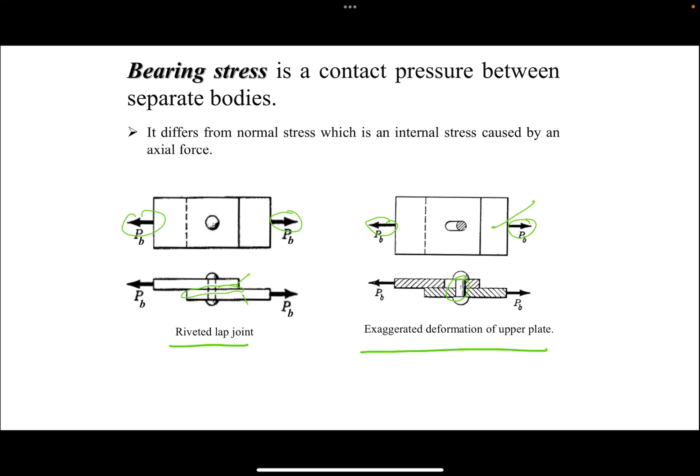Our axial forces appear here in our riveted lap joint, similar with the exaggerated deformation of the upper plate. So this is the view - we have forces pulling it, and the contact pressure that develops is our bearing stress.

The actual bearing stress distribution on the side of the hole is not constant. We know that it differs - the pressure here is not the same as the pressure in the middle and at the end point, so the pressure will still vary since it's not constant.

So the formula for bearing stress is given by PB over AB - our force over the area. That's always the formula for stresses, force over area. There's no difference there.

Again, sigma b is equal to Pb over Ab. For the bearing, this is the projected contact area of the rivet and the plate. So this is the projected contact area between these two separate bodies, which is the rivet and the plate.

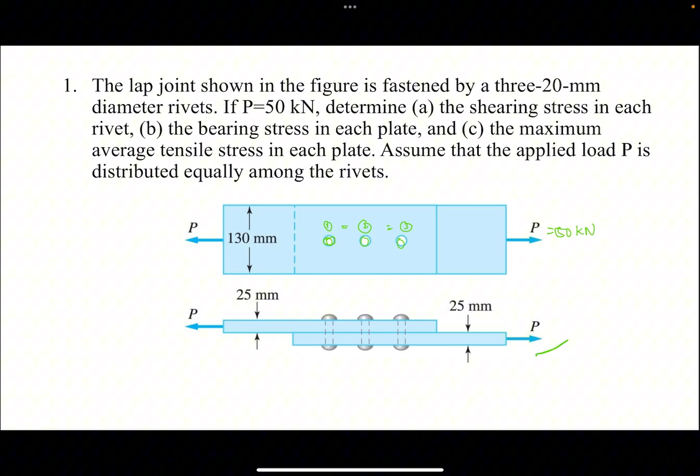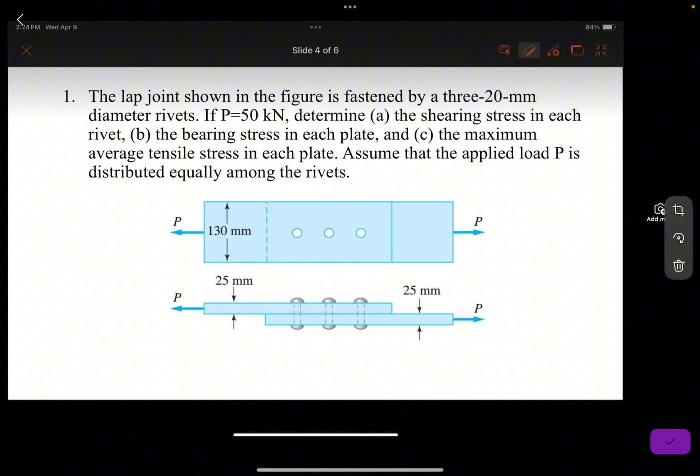Let's now solve the problem. Let's look at it carefully. What we'll do now is compute the stresses in each rivet.

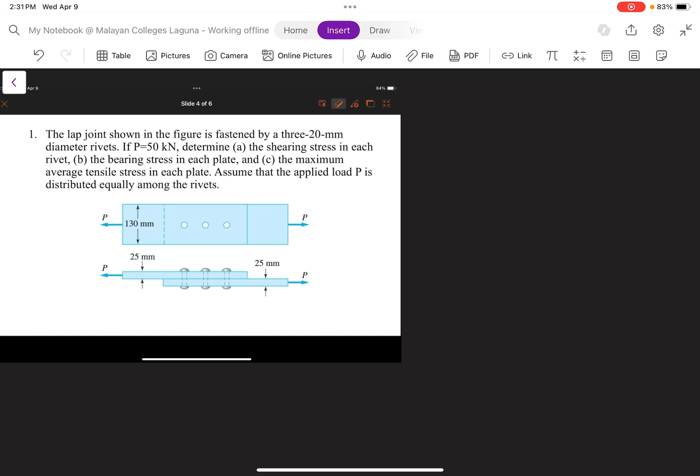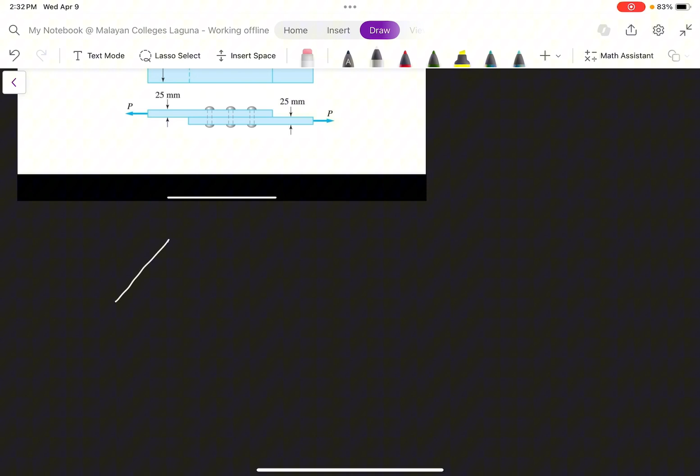So let's draw the free body diagram of our rivet. Let's draw it - this is also the free body diagram, the cross-sectional view, actually a 3D view. There's a force pulling there of 50 kN. Assume the drawing is even. This is our pin.

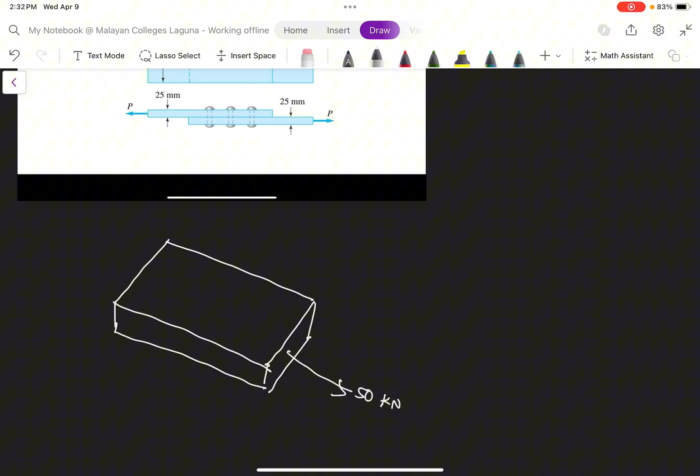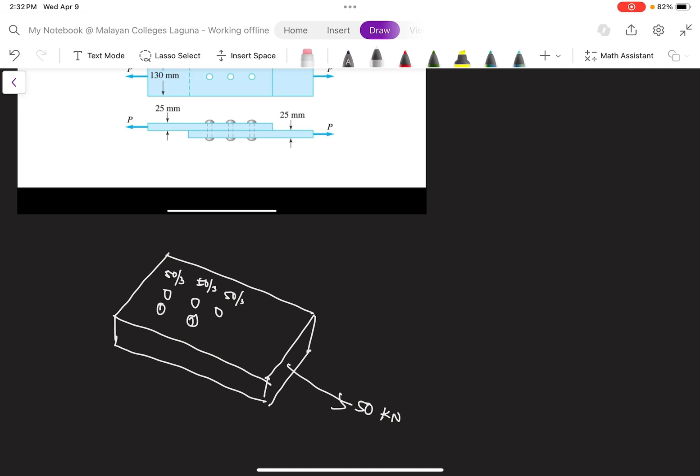So each rivet - we have rivets here. Equally, this will receive equally distributed load, meaning each gets 50/3, 50/3, 50/3, since we have three rivets in our system, in our body. This is the FBD of the plate.

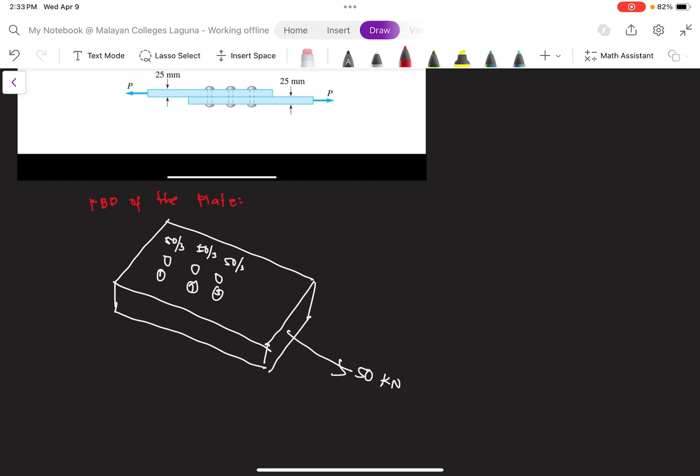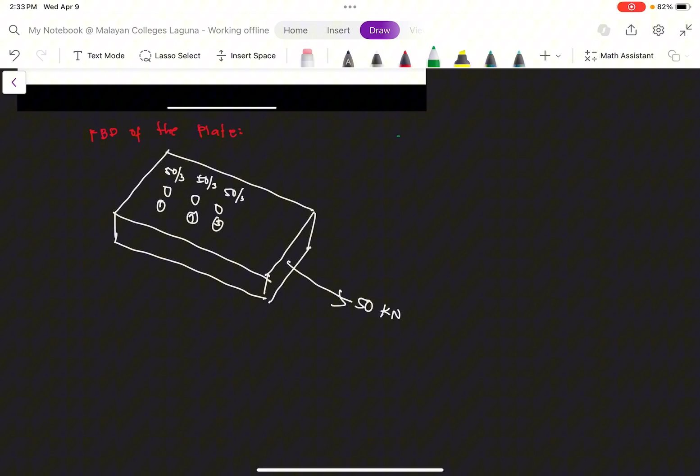What we'll do now is compute the shearing stress. For letter A - let's solve letter A. Compute the shearing stress in each rivet. We know the formula for shearing stress is tau equals the force over area.

Okay, since alam natin na yung load natin ay equally distributed sa tatlo, divide lang natin siya sa tatlo. So, tau is equals to the force, which is 50 kN over 3. Convert lang natin siya into Newton.

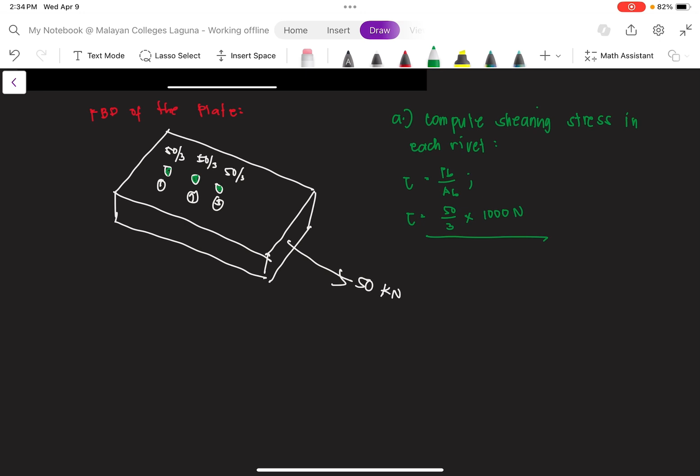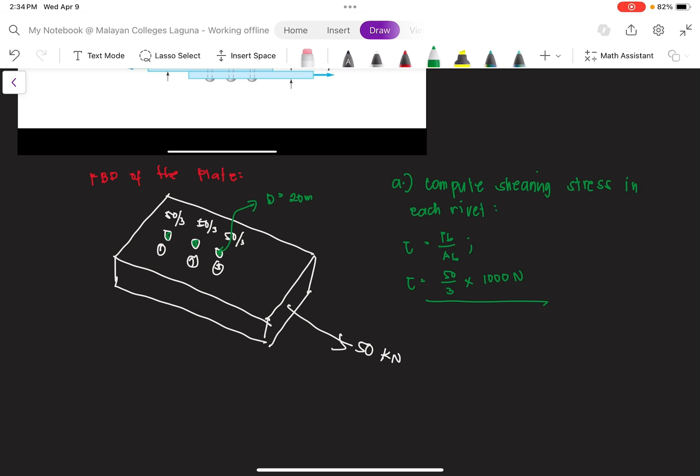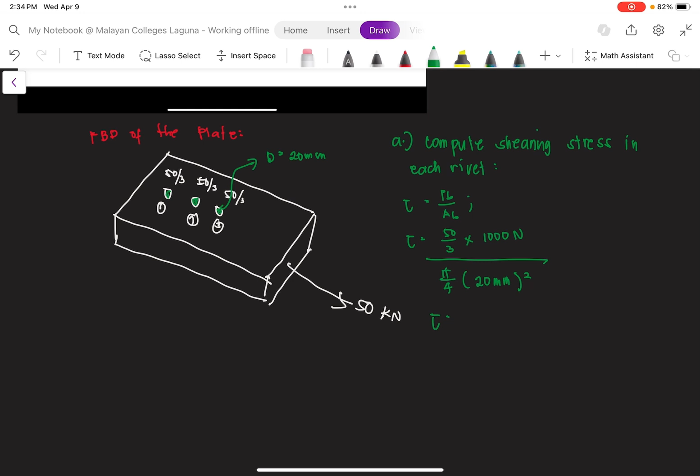Multiply natin 1,000 Newton all over yung ating area. Diameter natin is 20 mm. Kung babalikan natin, meron daw tayong three 20 mm diameter, pero ang diameter nito is equals to 20 mm. Area ay pi over 4 multiplied by the diameter, which is 20 mm squared. Ang tau natin ngayon, o yung shearing stress natin sa kada rivet, ay merong 53.052 megapascal.

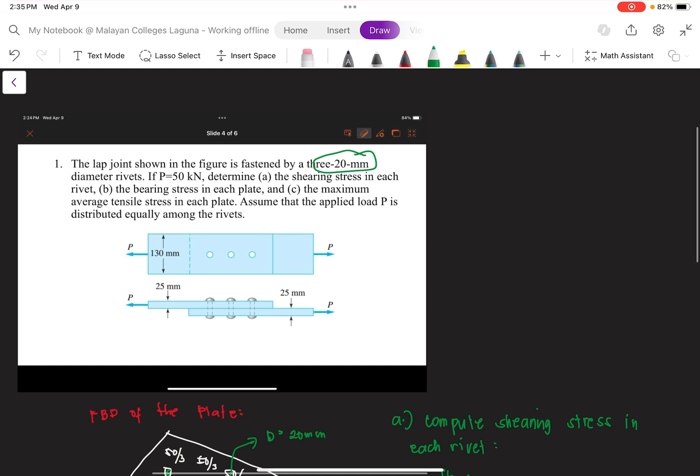Okay, nasagutan ba natin yung letter A? Yes, nasagutan na natin yung letter A, which is yung shearing stress. And this is now your final answer. So, ganun lang naman siya kasimple. Proceed tayo sa next question.

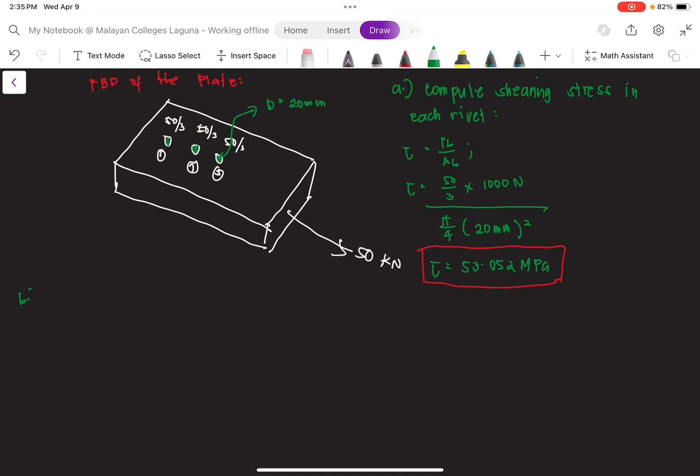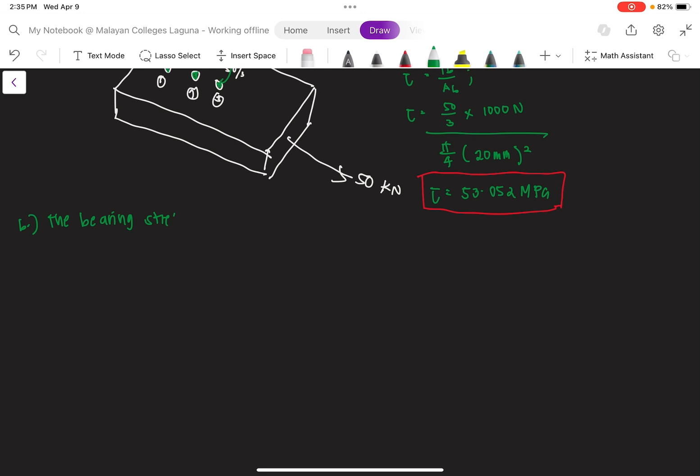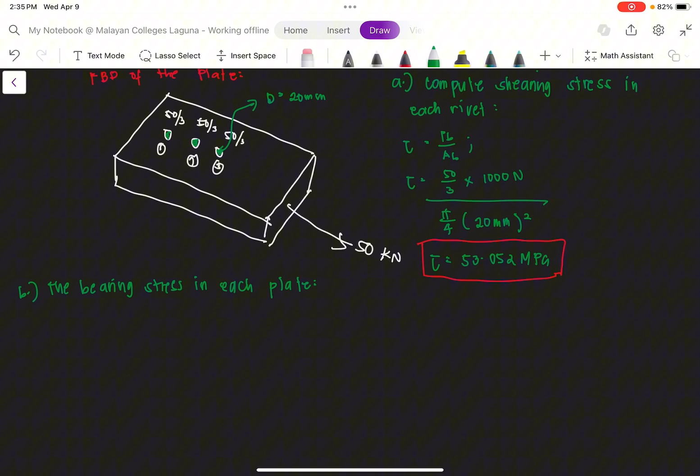The next question is the bearing stress in each plate. So, to compute for the bearing stress in each plate, may tatlong contact areas tayo na nag-resist sa 50 kN force natin, na kitang-kita pa naman natin dito sa ating free body diagram. Kung may tatlong holes dyan, matik, may tatlong contact kayo na magkakaroon ng ating bearing stresses. Again, by the definition, the bearing stress is the contact pressure between two separate bodies.

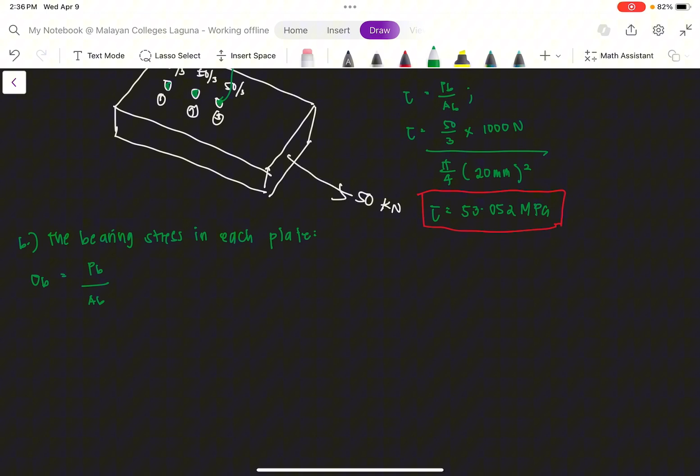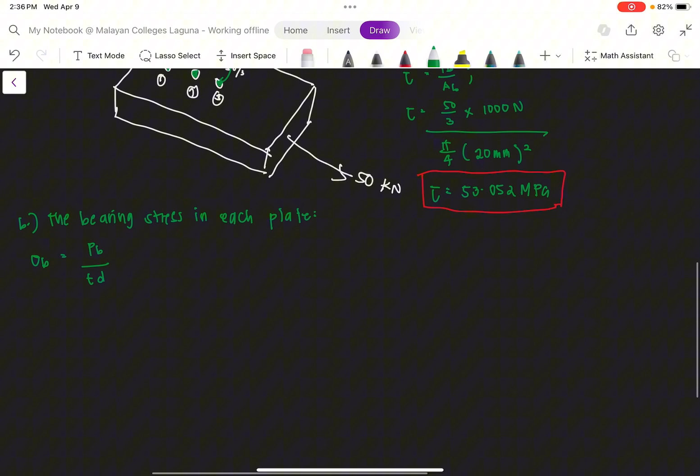Dahil nga nagkaroon sila ng contact, ang magiging bearing stress natin in each plate is given by this equation: sigma B equals to force PB over AB. Yung AB natin dyan, hindi siya kagaya nung kanina, baguhin na natin, that is thickness times the diameter. So that is also equal to, sigma B is equals to, ilan yung ating magiging force.

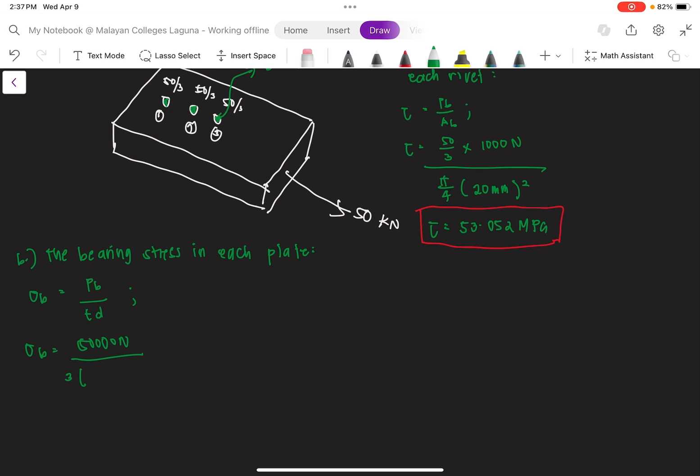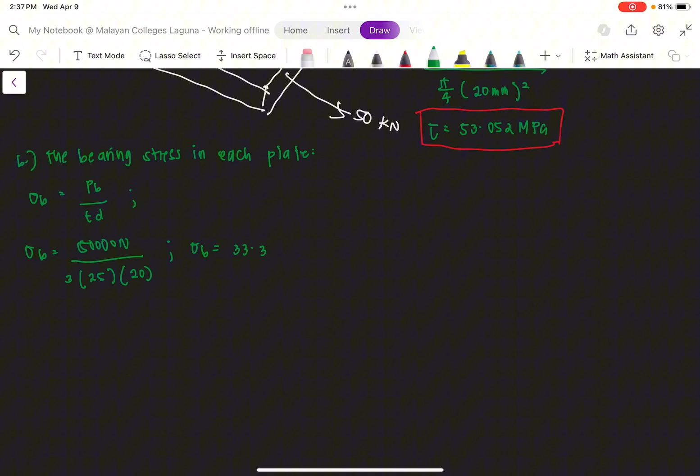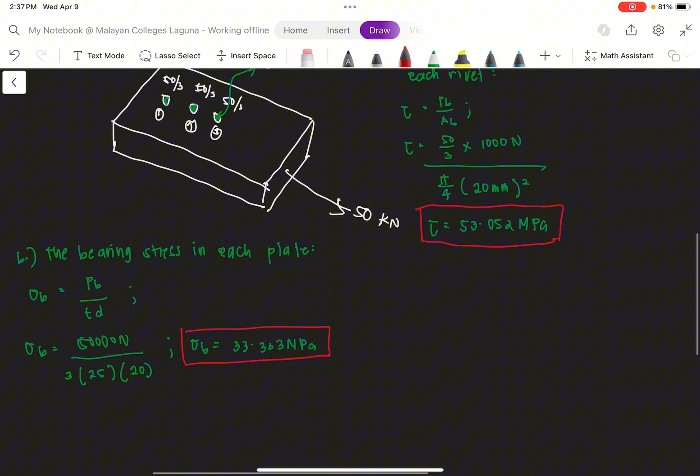Yung force natin is 50 times 1,000 Newton, that is 50,000 Newton. All over, ilan ba yung rivets natin? Tatlo, so multiplied. Ilan yung thickness natin? Thickness natin is 25 millimeters. Multiply natin sa diameter, which is 20 millimeters. Ating sigma B is equal to 33.333 megapascal. So ito ngayon yung ating final answer. Kuha na natin yung bearing stress ng each plate.

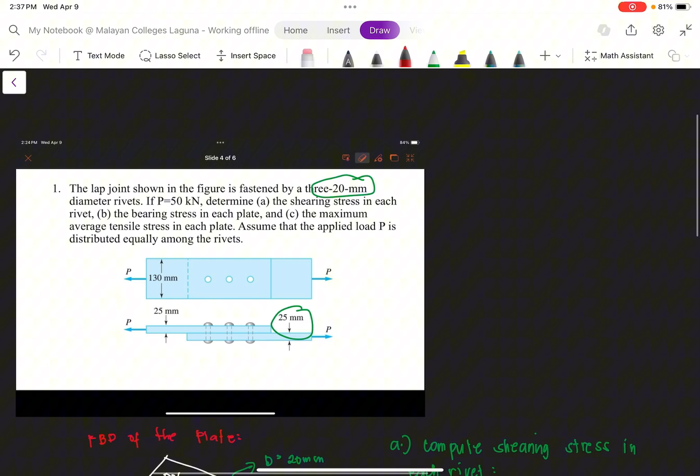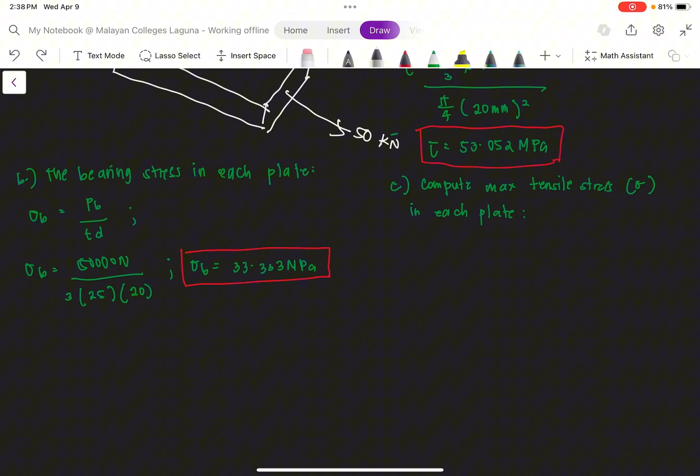Ngayon naman, kuhanin na natin yung maximum tensile stress. Letter C, yun yung pinapahanap, then maximum average tensile stress. So kunin natin yung average tensile stress in each plate. Kung titingnan natin yung ating magiging tensile stress in each plate, kung hahatiin natin to, kada isa nung...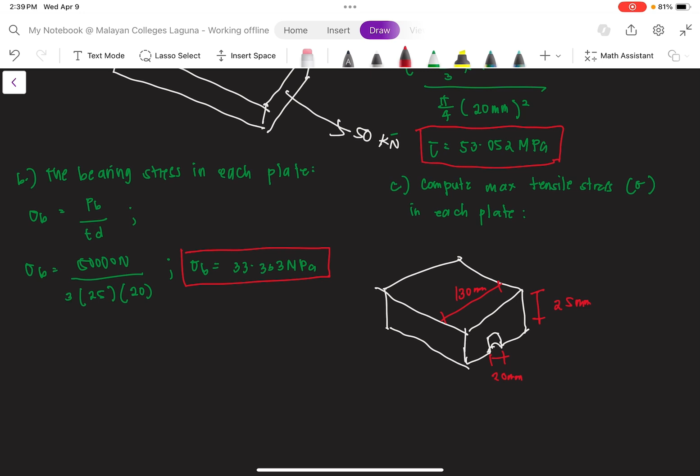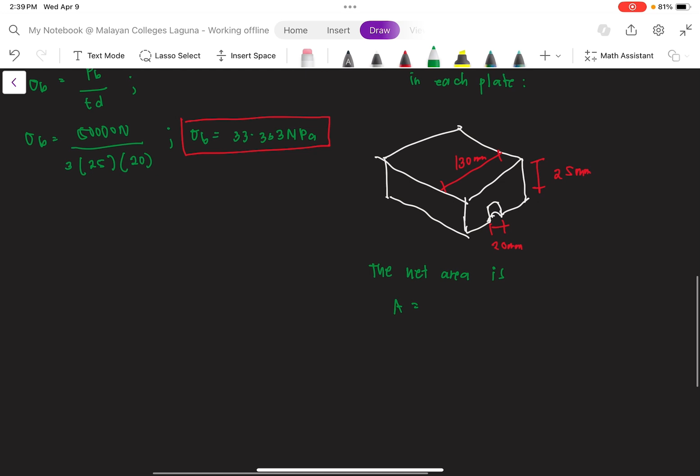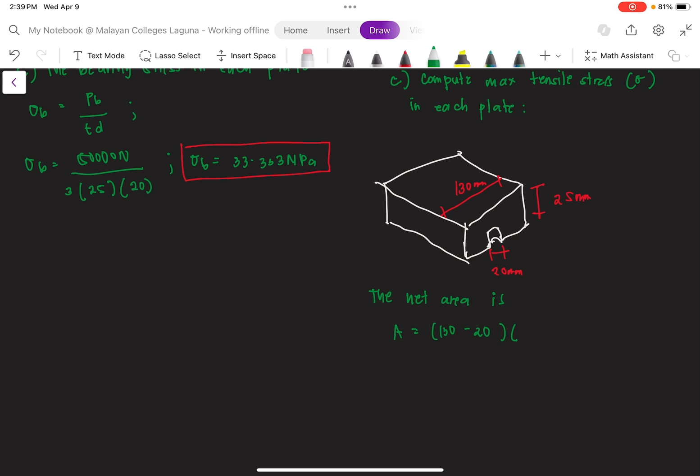Okay, so para makuha natin yung net area, kung yung area, net area is equals to, i-subtract natin yung 130 dun sa nawala, which is yung 20 millimeters. 130 minus 20, multiply natin ngayon sa ating thickness na 25. So ang ating net area ay equal to 2,750 square millimeter.

Okay, hindi pa yun man yung hinahanap natin ay area. Ang hinahanap natin dito is yung ating tensile stress. So para makuha natin yung tensile stress in each plate, force over area lang yan. Kuha na natin yung net area natin. Yung force natin is 50,000, all over the area, that is 2,750. Your tensile stress is equals to 18.182 megapascal. So ito na ngayon yung inyong final answer.

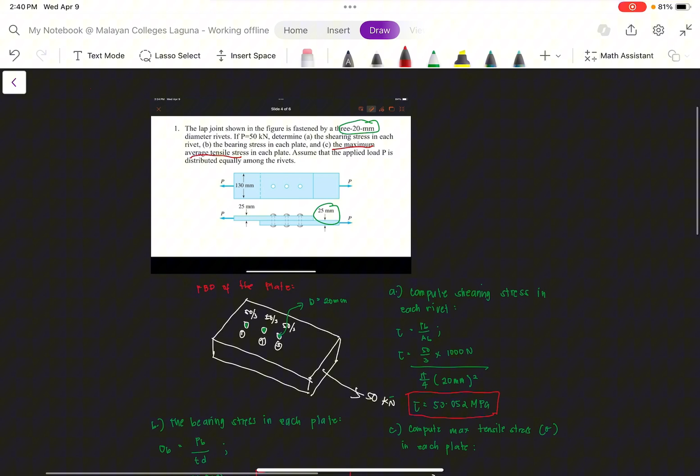Okay, so na-solve na natin itong ating first sample problem: yung ating shearing stress, yung ating bearing stress, at yung ating tensile stress in each plate.

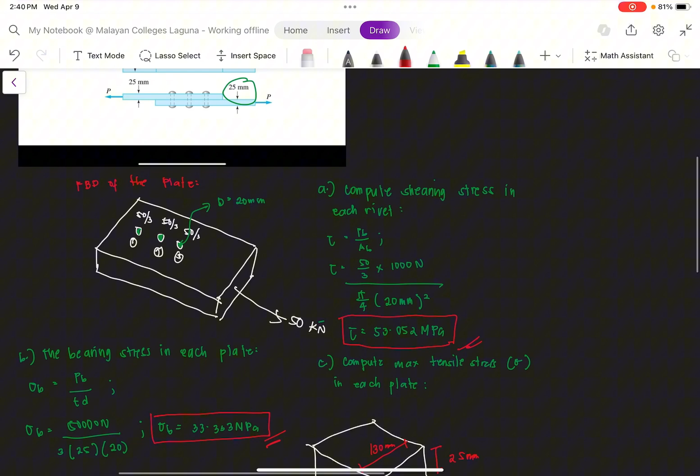Next, the second problem. The steel end cap is fitted into grooves cut in the timber post. The working stresses for the post are 1.80 megapascal in shear parallel to the grain, and 5.5 megapascal bearing perpendicular to the grain. Let's determine the smallest safe dimensions of A and B.

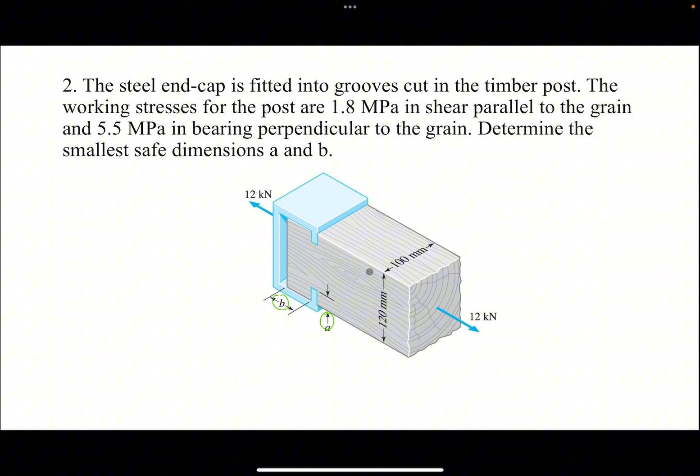So kailangan daw nating malaman yung dimensions ni A, yung thickness, ito, yung B din. Kasi nga may steel end cap daw na nakakabit doon sa ating groove o yung kahoy natin. Dali lang naman tong sample problem na to.

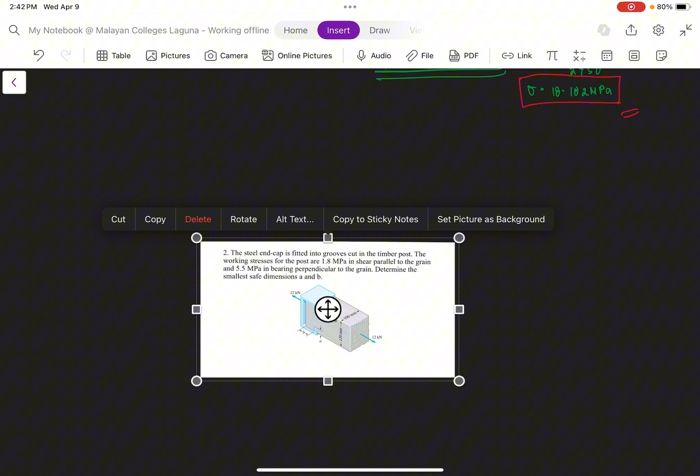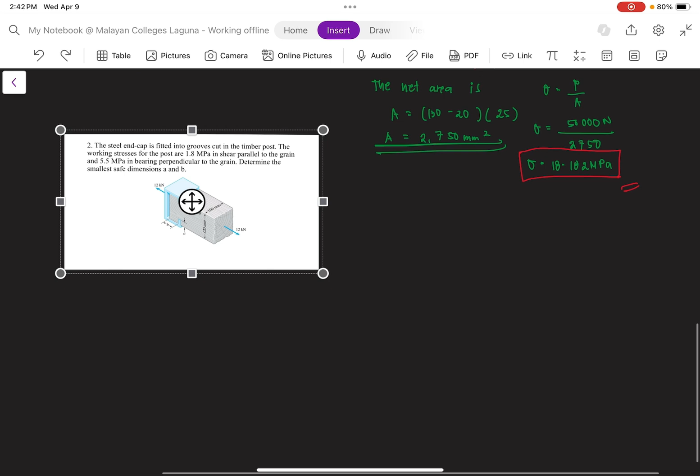Cut. Ayun pala. Okay.

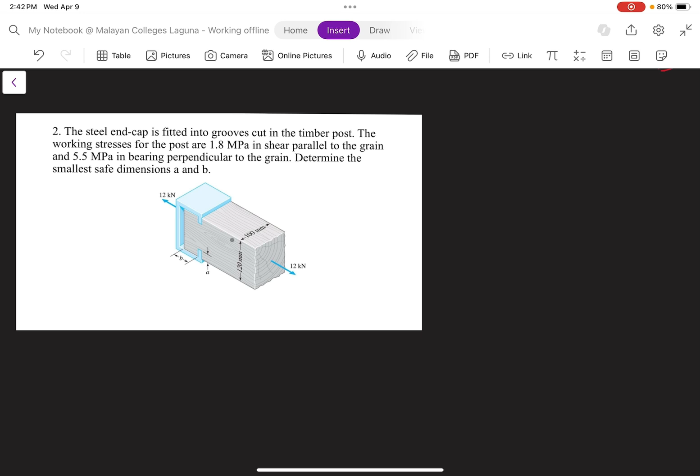So dito, para ma-solve natin yung dimensions ng A, we consider the bearing stress. So i-note natin that there are two contact areas, the shaded blue and the 12 kN force. Okay, dalawa yung magiging contact natin: ito at itong force natin na ito.

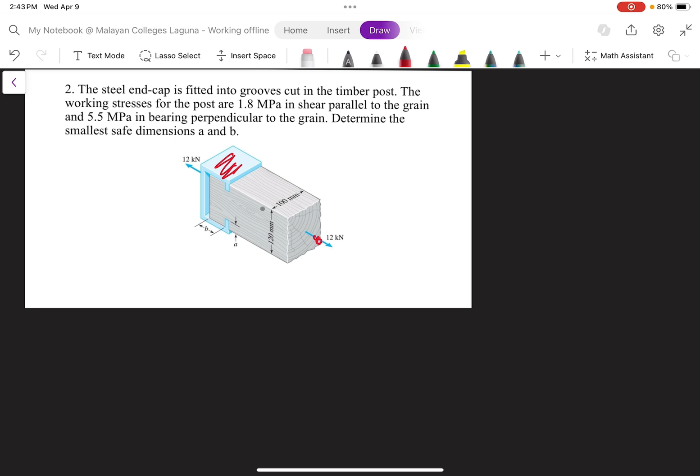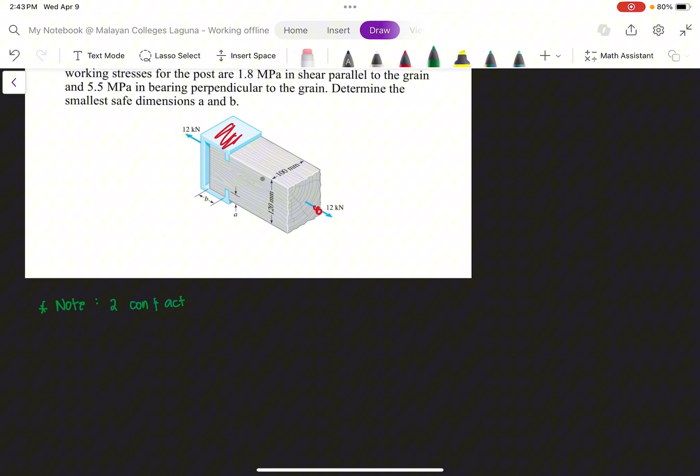So ngayon, solve na natin. Note lang natin, two contact areas tayo, which is yung shaded blue and yung resisting force natin.

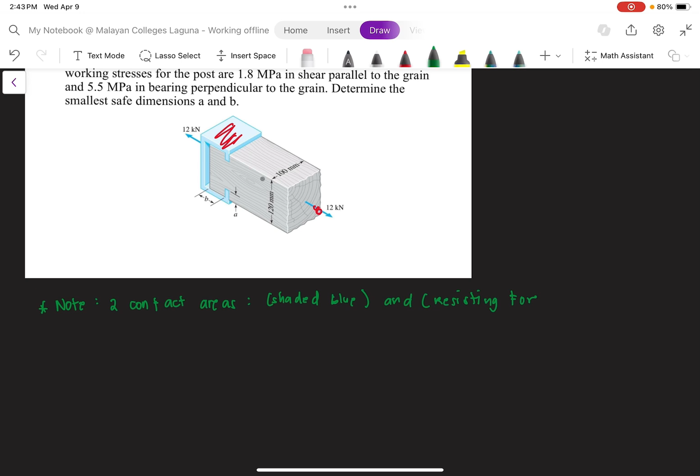PB or sigma B is equal to PB over AB. So, our bearing stress is equal to the force over the area.

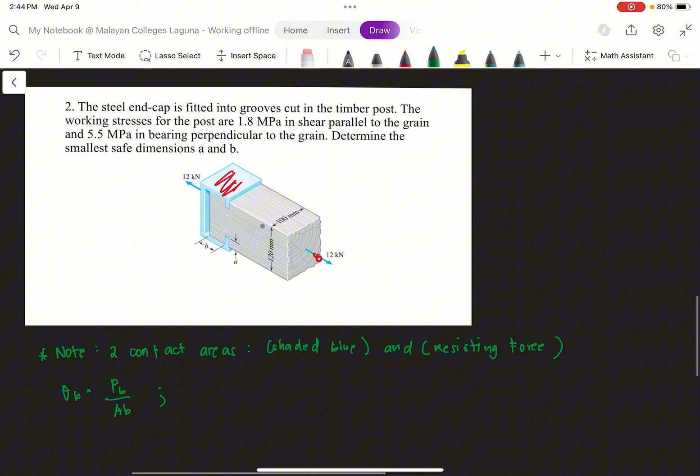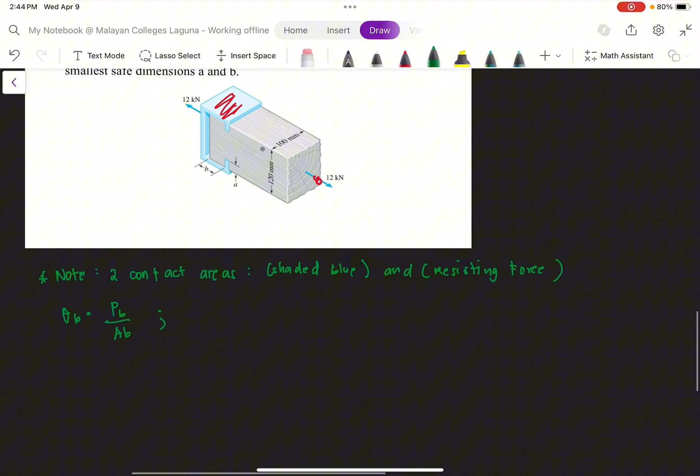Okay, we were given this in the problem. The working stress for the post is 1.8 in shear and 5.5 megapascal in bearing perpendicular to the grain.

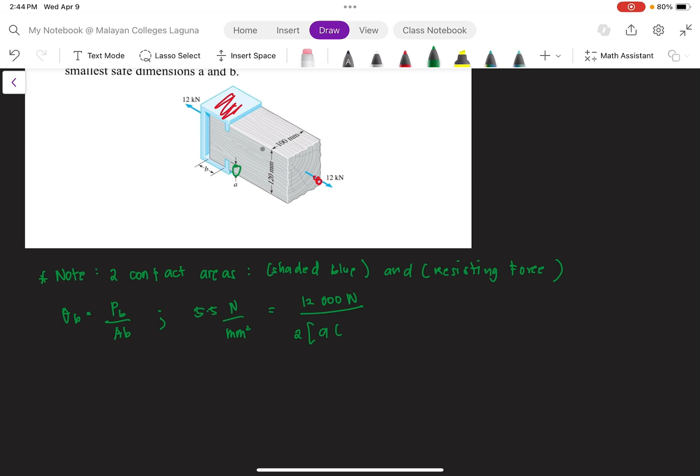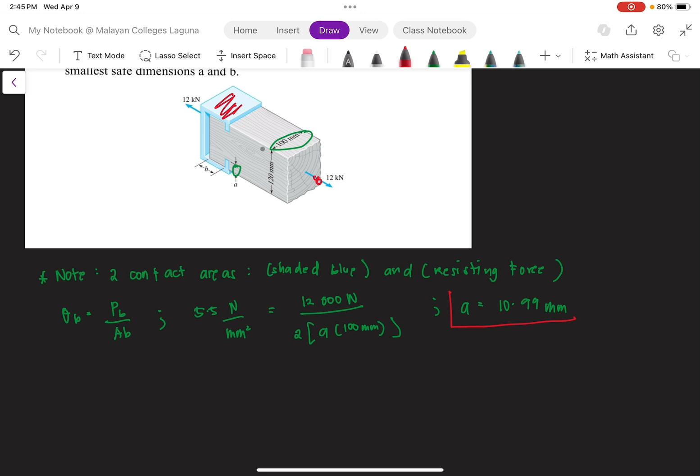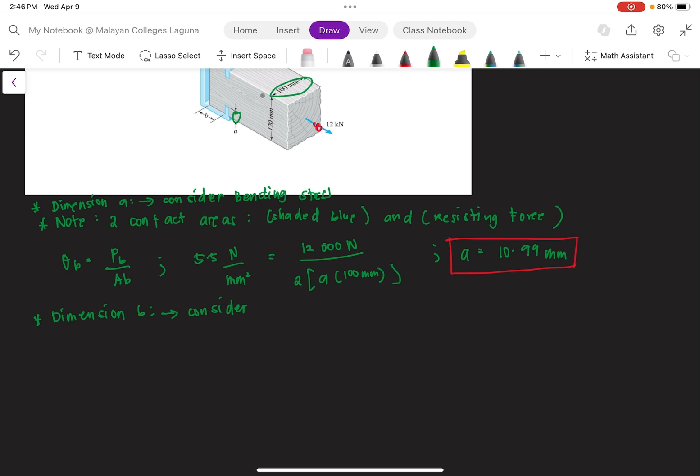Next, to compute dimension B, let's label this dimension A. For dimension B, we consider the shearing stress. Because in B, what governs is the shearing stress, unlike in A where what governs is used when we find the bearing stresses. So let's consider the shearing stress here.

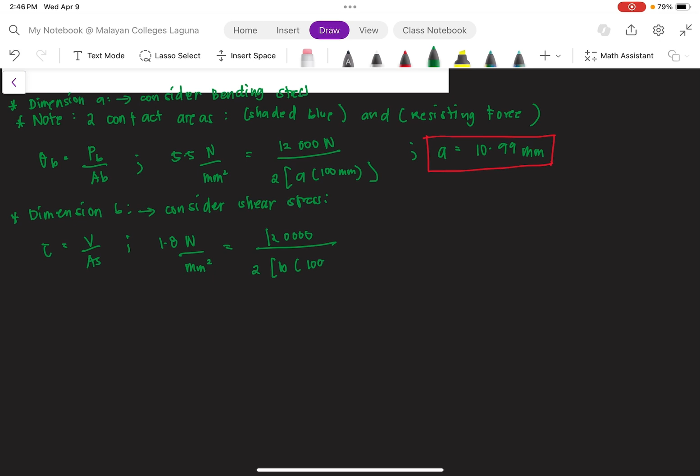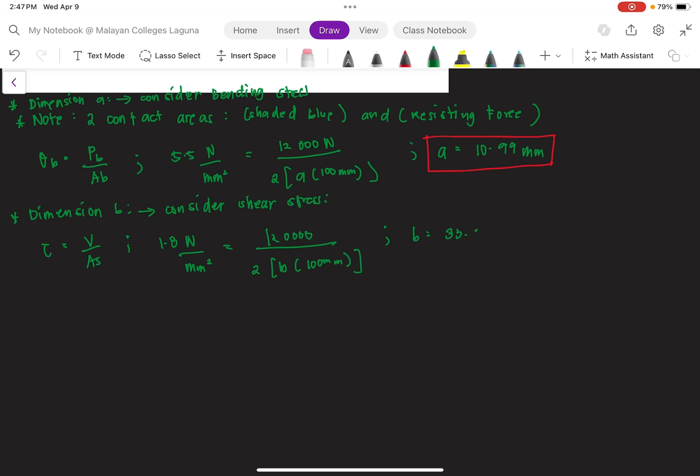For shearing, tau is equal to V over AS. Our tau, as given in the problem, is 1.8 megapascal. So, 1.8 Newton per millimeter squared is equal to 12,000, our force, all over 2 multiplied by B, multiplied by our width of 100 mm. So we can now get the minimum safe value for B, which is 33.333 mm. This is now our final answer.

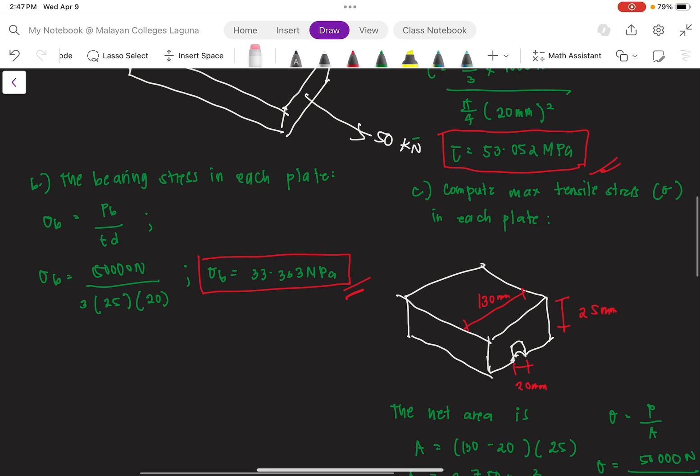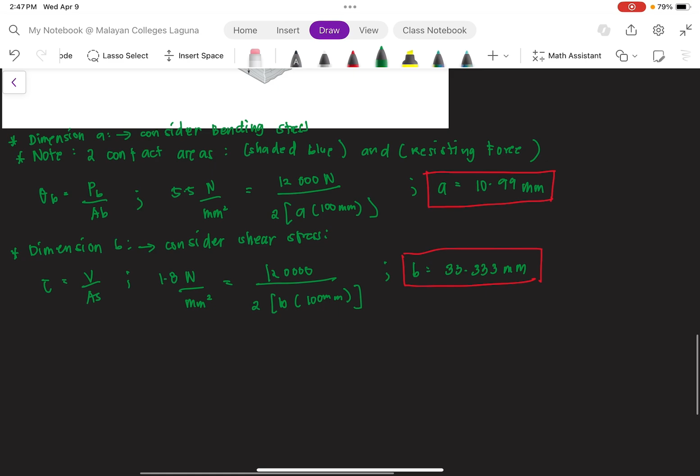Now, for our next sample problem: the lap joint shown is fastened by 3/4 inch diameter rivets. Let's calculate the maximum safe load P that can be applied if the shearing stress in the rivets is limited to 14 KSI, and the bearing stress on the plate is limited to 18 KSI. Assume that the applied load is uniformly distributed among the 4 rivets. We have two limitations: the shearing stress on our rivet is 14 KSI, and the bearing stress on the plate is 18 KSI.

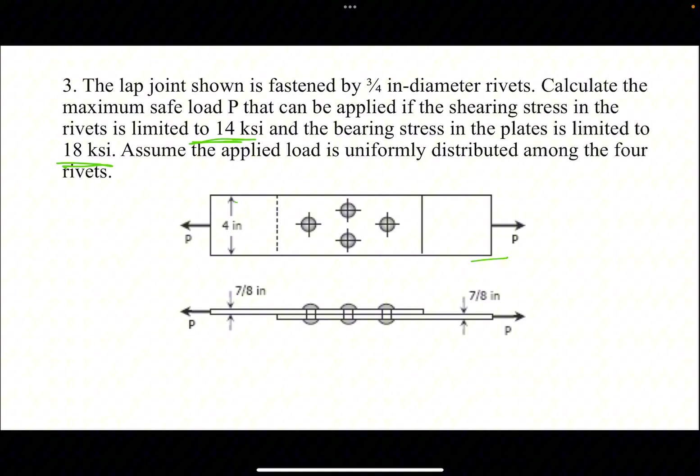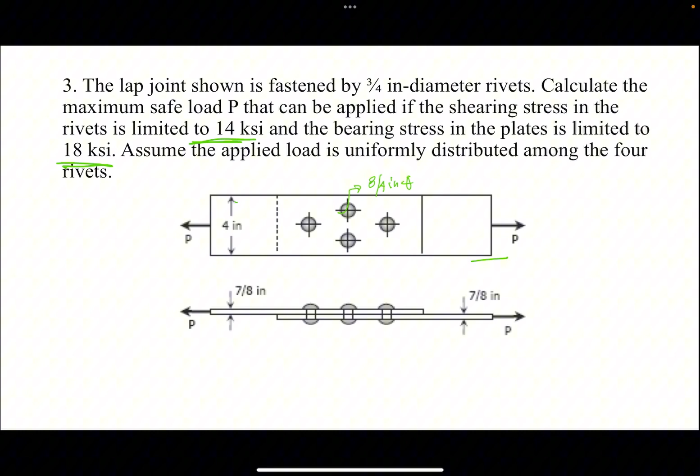This is our view. The given width is 4 inches. The diameter of the rivets is 3/4 inches, and it has a thickness of 7/8 inches. Let's solve the problem.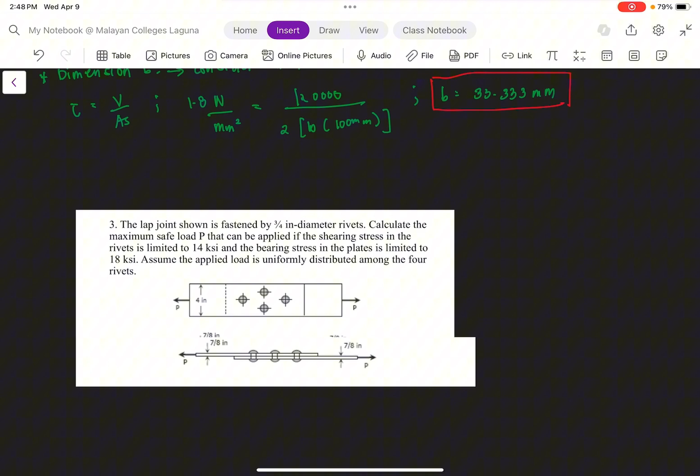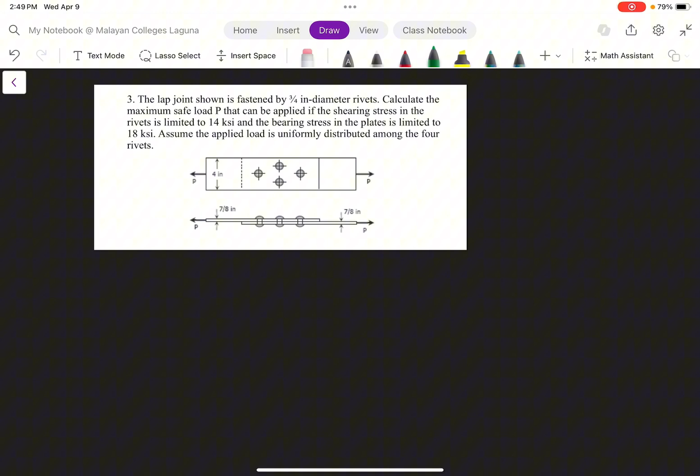So there are two given conditions here. Let's start with the shearing of the rivets. Based on the shearing of the rivets, the formula is tau equals force over area. In this case, let's take our force P, so V is equal to P.

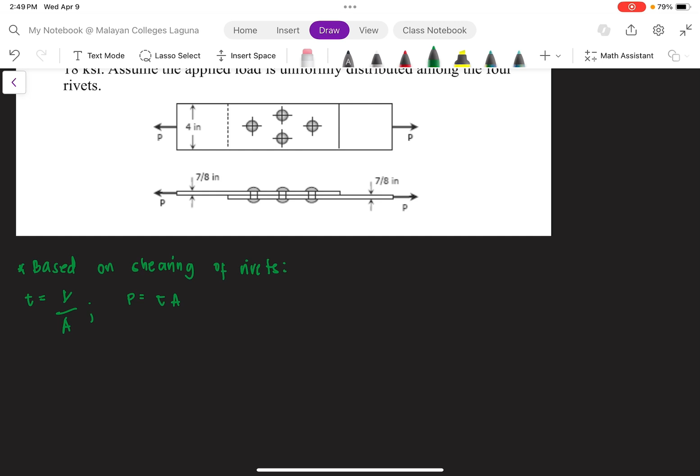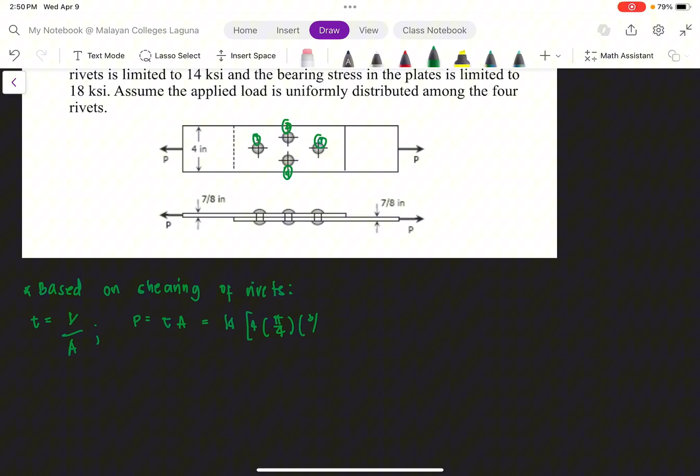So P is equal to tau multiplied by the area. That is equal to our tau, which is 14 kilopound per square inch, multiplied by our area. We have 4 rivets: 1, 2, 3, and 4. So 4 times pi over 4 multiplied by our diameter of 3/4 squared. So our force P is equal to 24.74 kilopounds, or kips.

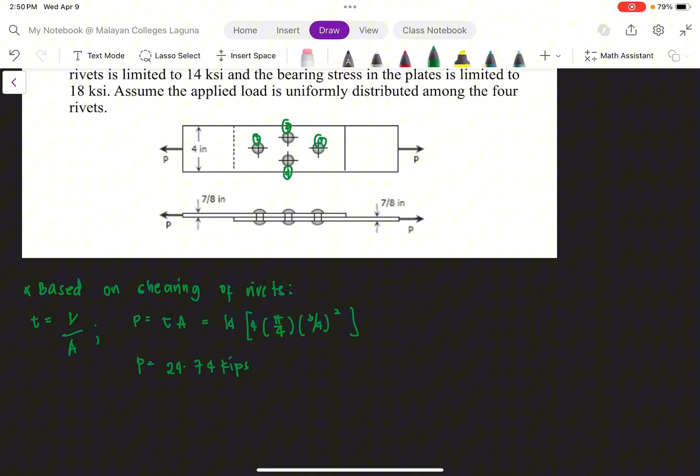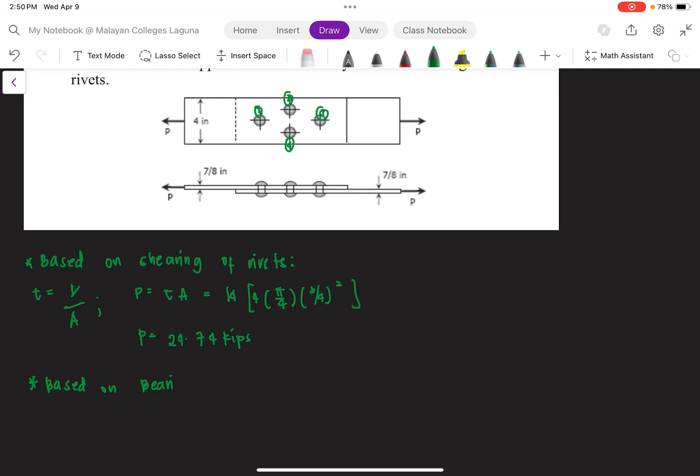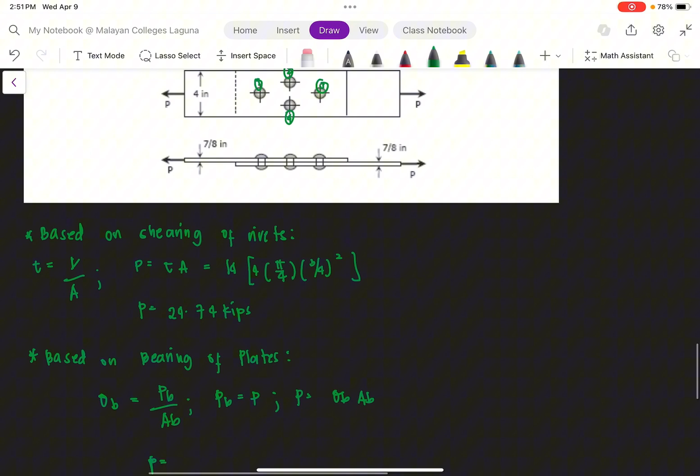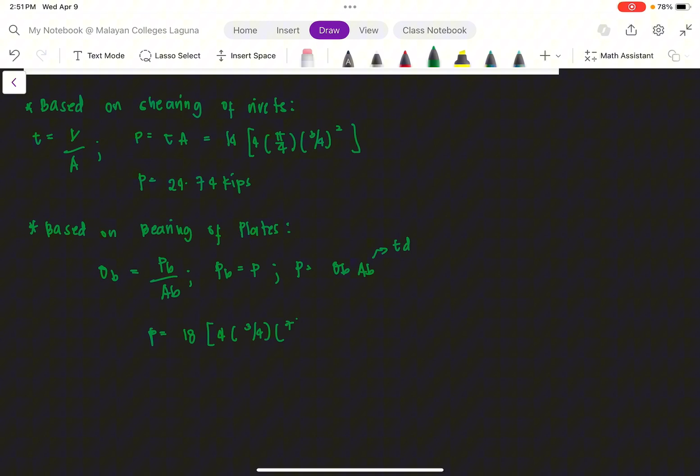Next, let's base it on our bearing. Based on the bearing of the plates, the formula is sigma B equals PB over AB. Let's take PB as equal to P. So P is equal to sigma B times area B. That is, limited to 18 KSI. So 18, multiplied by how many rivets we have, which is 4. So 4 times our thickness, again our AB is thickness times the diameter. So 4 times our diameter of 3/4 and our thickness of 7/8.

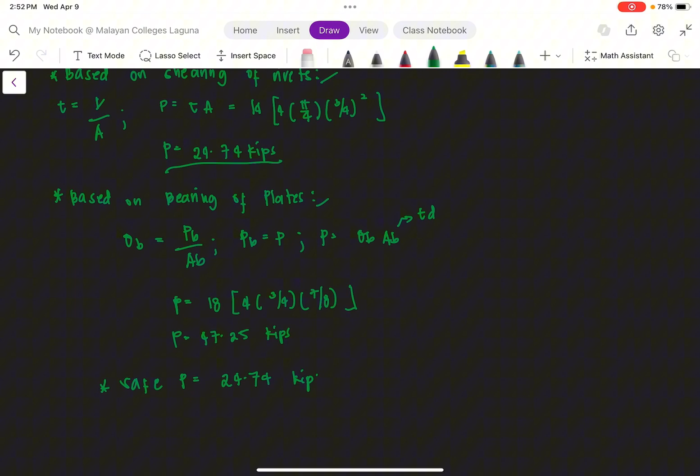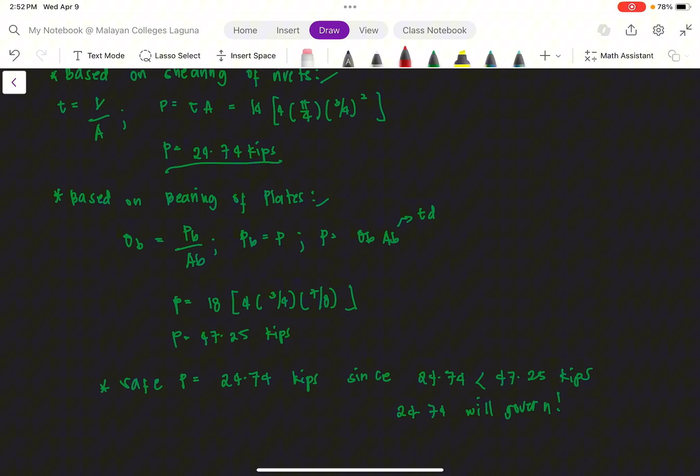So our force here is equal to 47.25 kips. This means, when choosing, the maximum safe load that can be handled by both the shearing of the rivets and the bearing of the plates is 24.74 kips. Therefore, the safe value of the load is equal to 24.74 kips, since 24.74 is less than 47.25 kips. So 24.74 will govern. This is now our final answer.

So that concludes our discussion on bearing stresses.